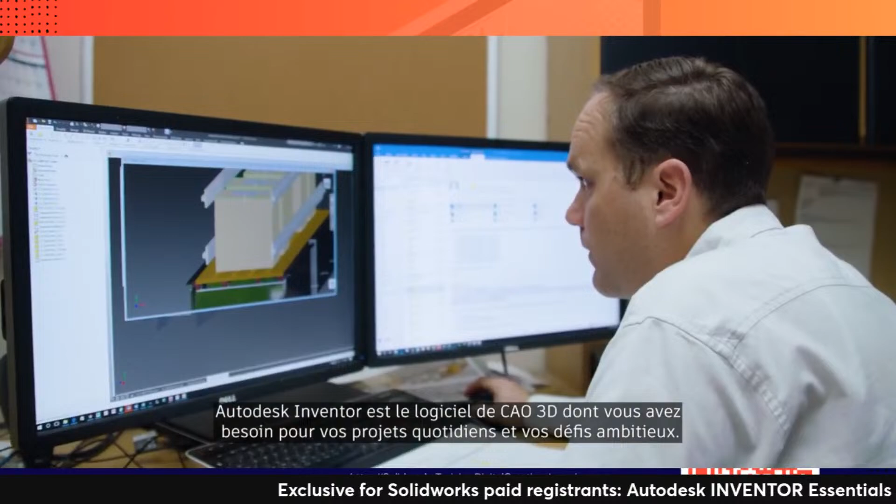From the smallest components to the largest assemblies, Autodesk Inventor is the 3D CAD software you need for everyday projects and ambitious challenges. Inventor puts powerful mechanical design, documentation, and product simulation tools at your fingertips to help you innovate with agility, collaborate effectively, and win more business.

Inventor provides you with a stable and responsive environment to help you get your projects to production faster, with a complete set of tools for sheet metal, welded frames, tube and pipe, and electromechanical, and direct access to a robust content library and engineering calculators.

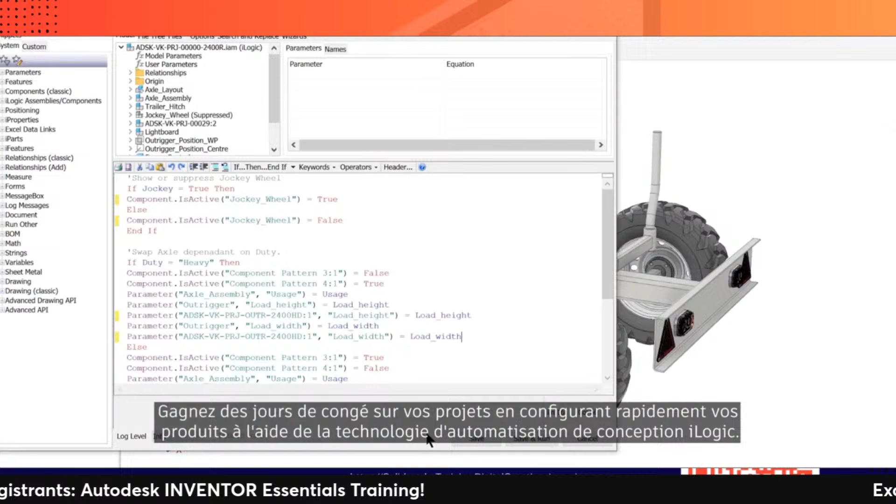Shave days off your projects by rapidly configuring products using iLogic design automation technology. Speed up design reviews with a cloud-based tool that protects your intellectual property. Connect directly with AutoCAD for your project workflows.

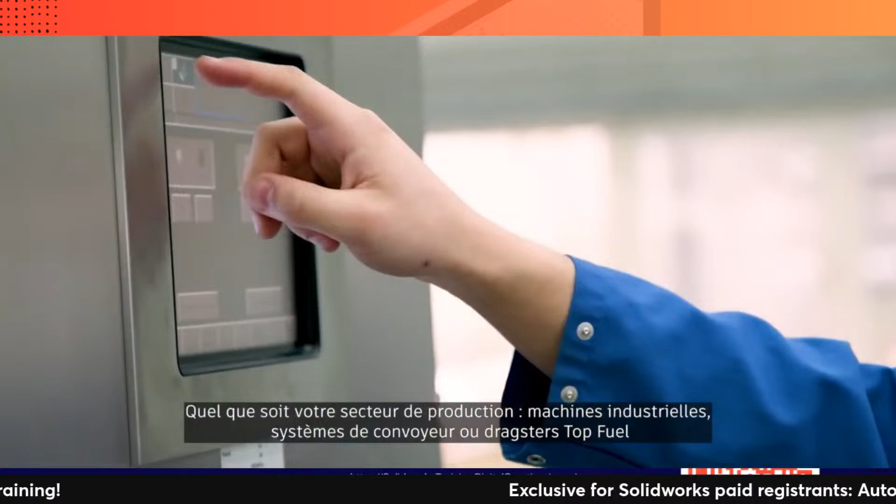And you can extend the power of Inventor with a subscription to the Product Design and Manufacturing Collection to take your designs further with 2D and 3D workflows, cloud-based design and manufacturing, factory planning, and high-end visualization. Regardless of what you make, industrial machines, conveyor systems, or top fuel dragsters, solve your most interesting problems efficiently and effectively with Autodesk Inventor.

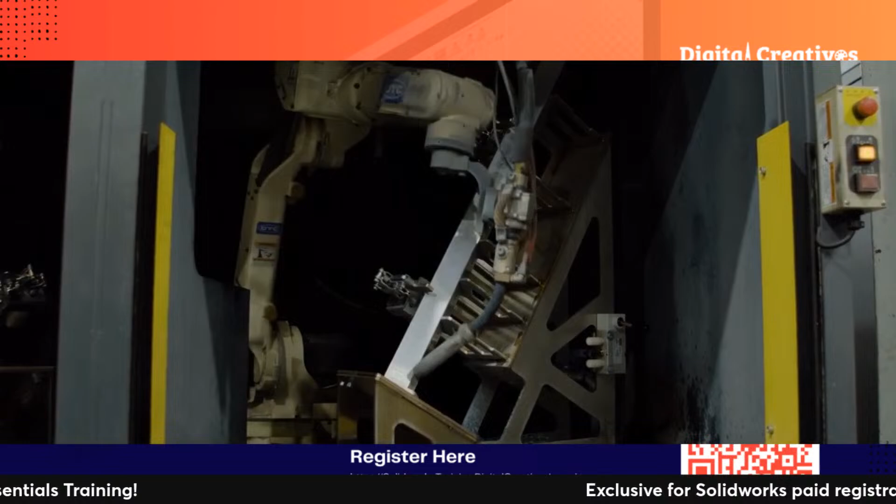A simple project that would have taken 4 hours, we can now do in 20 minutes. And a complex project that would have taken 2 days, we can do in 2 or 3 hours.

We design, manufacture, deliver, and install custom staircases. Every system is new for that customer, so every system is at least a 1/16 of an inch different. We're often one of the last products that gets installed in a home, and if we don't get it right, we can delay them getting a certificate of occupancy.

Without iLogic, it took quite a bit to draw even the simplest of orders. It was very disheartening how much manual labor went into it. We could draw maybe 1 order a day.

We turned to the Autodesk Product Design and Manufacturing Collection. Autodesk Inventor and iLogic has allowed us to automate the engineering or project management process. A lot of things in stair design are repetitive tasks, and iLogic enables us to automate a lot of those so that a human operator doesn't have to get lost in the minutia.

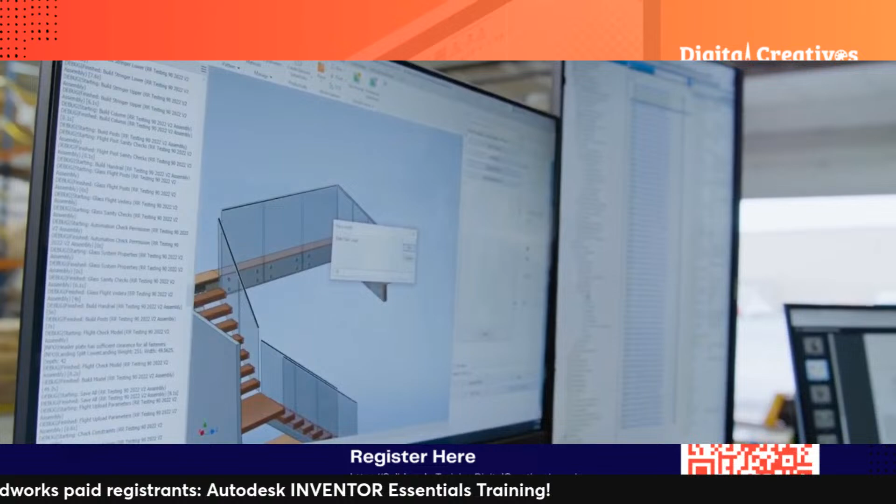So let's say we decided to pull a foot off of that floor, we added a wall there. I would come in and modify the environment, tell it the length, put in either an absolute, or in this case, if they said we subtracted 10 inches, I'd do it. And I would just tell it to update all my glass.

It's going to automatically engineer it for me. It's going to make it so that it meets all building codes that our product is certified for, and it's going to generate shop drawings and production prints for these as it goes. It's that easy. We're manufacturing 10 systems, 20 systems a day right now.

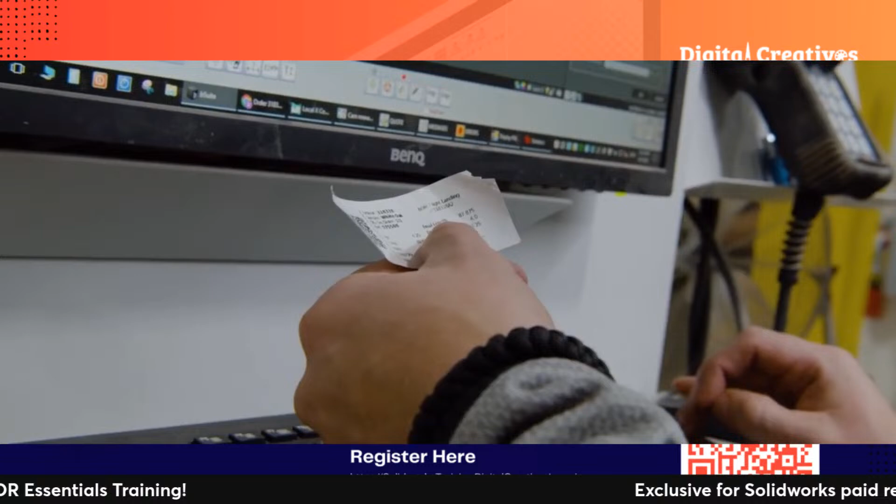With the Inventor CAM, we take the exact model that is part of our automation that we've used to design for the customer, and it's already toolpathed. So that production engineer is just posting that right to the machine. It's a huge time savings, and it's a quality assurance. As we build in more and more automation, we continue to drive down the potential errors that a user can make.

Welcome to Viewrail. Thank you. Have a seat. We leverage the Forge viewer. It enables the customer to view on a web page on their phone exactly what we are engineering and how it will fit into their space.

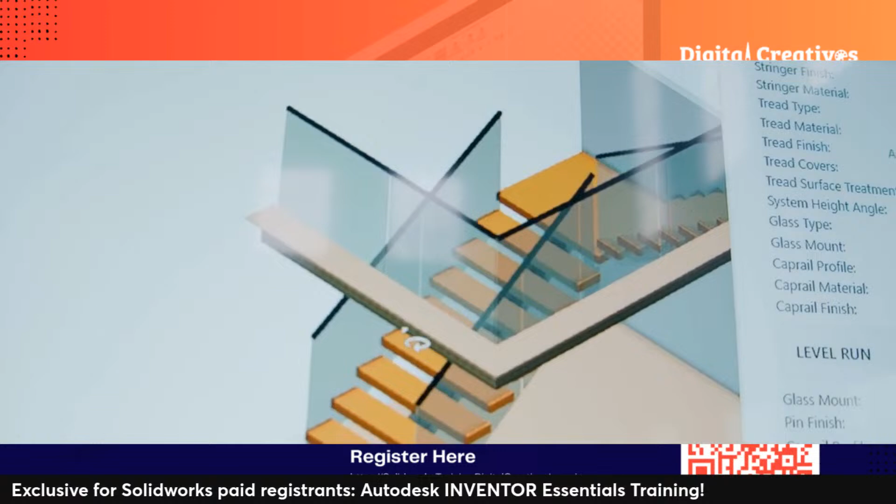This looks amazing. We are now over 10 times the size that we were when we started all of the automation. In the next 5 years, we're going to grow from $100 million a year in revenue to $500 million. Automation is critical for scaling at the rate that we're going. We would not be able to do the things that we are doing today and looking into the future without the Autodesk tools.

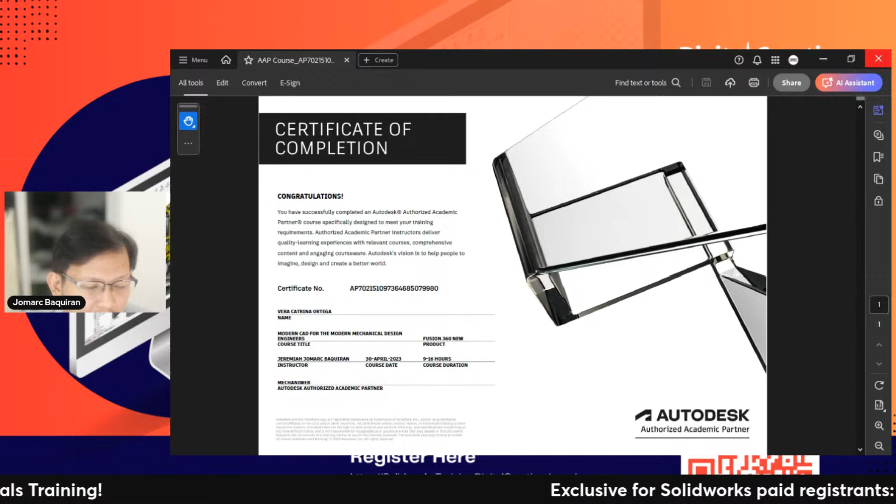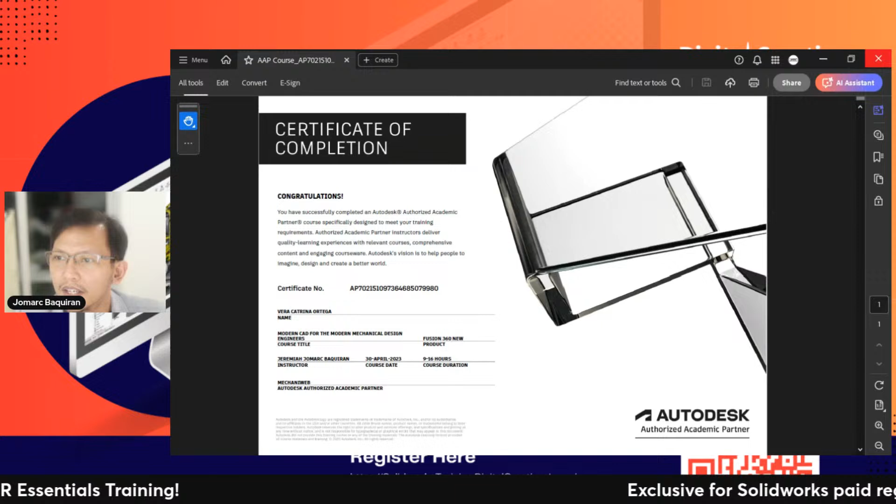Okay, giving you ample time, requesting everyone to start up the Inventor software. I have gone ahead, I already have my Inventor with me. I'm going to close this, going back to the default mode. You can actually open multiple instances of Inventor, I have several opened here.

These cars go over 330 miles an hour and they travel 1,000 feet in less than 3.5 seconds. To accomplish something like that is really tough on the parts. This is not a business where you can make a ton of mistakes. If we don't do our job down to the smallest detail, that driver's life is in our hands. Everything has to be built right. Everybody has to be on their game.

Welcome to Charlotte's Z-Max Dragway for the 4 Wide Nationals. Safety is number one, and then second would be performance. We need to make sure our equipment's strong enough and light enough where we can outperform our opponents. Currently they're finishing up the track prep, we've got Top Fuel Dragsters up next for you. At the 4 Wide Nationals, we had the Autodesk car on Doug Kalitta's Top Fuel Dragster. My expectation is to win every race we go to. In lane 2, we have Doug Kalitta with the Autodesk car.

Inventor is helpful because races in our league can be decided by a thousandth of a second. So if we find something on a part to make it a little bit stronger, a little bit lighter, or a little bit better than what everybody else has, that makes us a big part of winning races. Kalitta crossing the finish line first, clocking in over 330 miles per hour. Seeing something get made and then put on the race car, and us going out and running over 300 miles an hour, that's pretty neat to see.

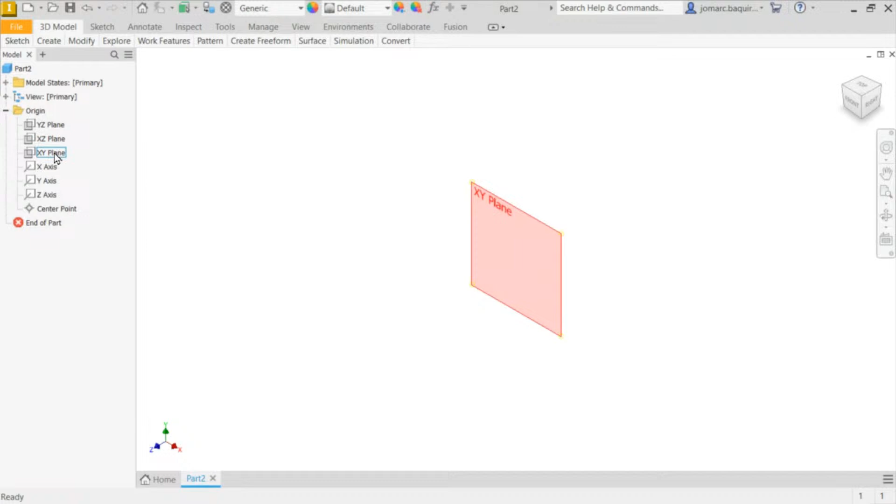Let's first be familiarized with the navigation. So I want you to head over to the XY plane. Again, on the browser or the model tree, I want you to click on XY plane.

Right click and select New Sketch. Again, our view is normal to the XY plane. I'm going to cycle over these controls - I want to see the full view of my ribbon, so I click this minimize to panel buttons. Again, for the absolute beginner, let's get ourselves familiarized with the controls and navigation.

I'm going to click on rectangle. Left click here, left click here. I'm not too concerned about the dimensions. The rectangle tool is still active, so I'm going to hit escape, then select finish.

So whenever you see this green check mark, it's an indication or visual cue that we are in sketch mode. So I'm going to click on finish.

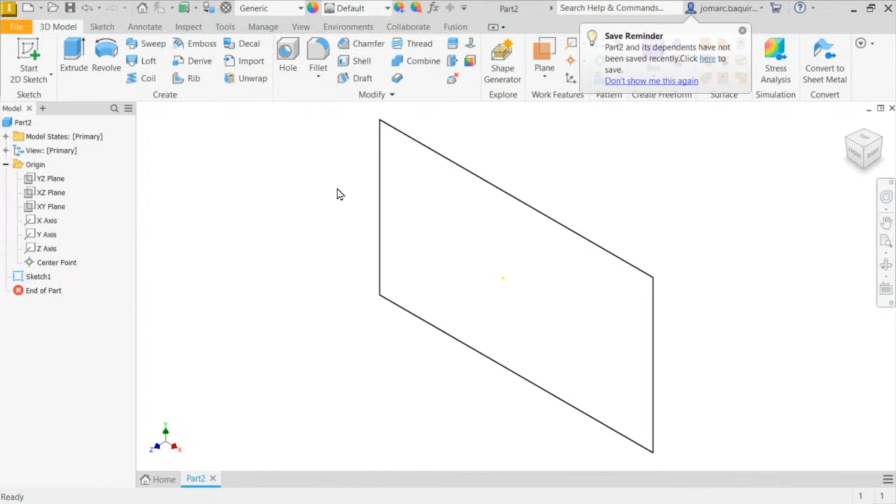Okay, next I'm going to hit extrude. So it automatically selected this profile. Let me pull this arrow, giving this a height or depth, and select OK. So as quick as that, we have created a 3D model coming from a 2D sketch.

So for the controls, if I roll out my scroll wheel, I want you to roll this until it's completely far away. To bring this back to the full extent of our screen or canvas...

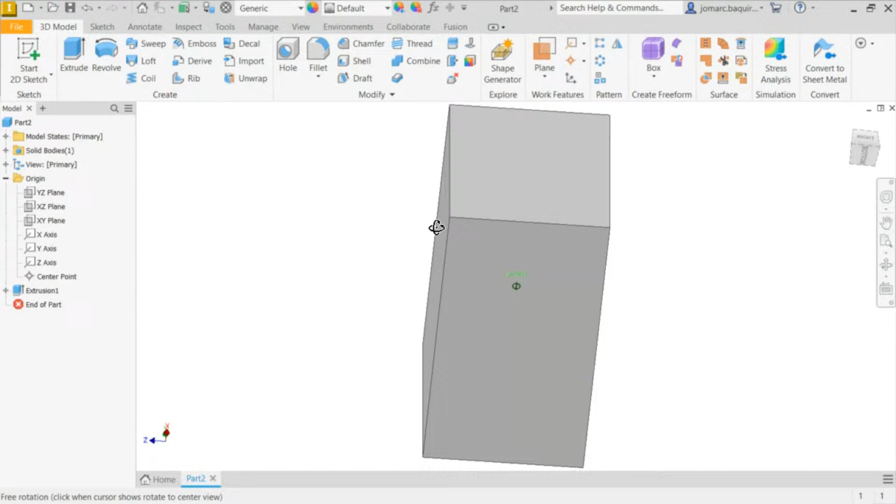I'm going to double click on my middle mouse - that brings it back to full extent. And to rotate this, it's shift and holding our middle mouse. I'm rotating or orbiting this 3D model, and to go back to the default isometric view, it's hitting F6.

And if I would like to pan the view, it's holding the middle mouse. Notice that hand when I'm pressing the middle mouse button - so I'm panning, currently rotating. And if I hit F6, it goes back to the default isometric view.

Feel free, giving you a few minutes, few seconds to be familiarized. Okay, so hope you are familiarized with the navigation already.

Next, notice as well on our model tree, a recording of our actions was made. Initially, pay attention to your left side of the screen - recall we created a sketch, right? And then we created an extrusion, and that sketch was consumed by this extrusion.

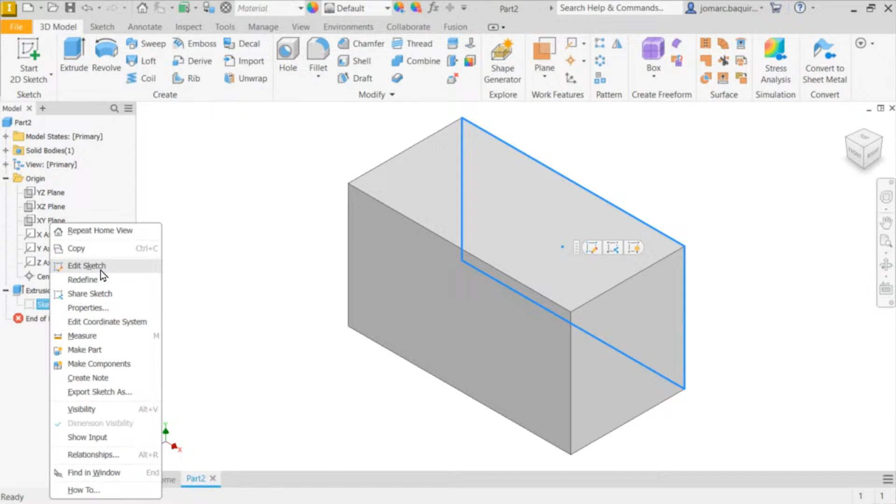So we're now again in sketch mode. Again, the visual cue is this green finish check mark.

I'm going to create a window selection - window, same as AutoCAD. This is window, and this is window crossing. Notice the difference: for window selection, the entity to be selected needs to be entirely inside this rectangular pinkish rectangle, so everything inside gets selected. For crossing, whatever this window hits gets selected - so if I create a window selection here, this side, this entity or line, will not be selected.

So again, creating a window selection, right click or hit delete. I want you to select delete. So we're creating a fresh or new sketch.

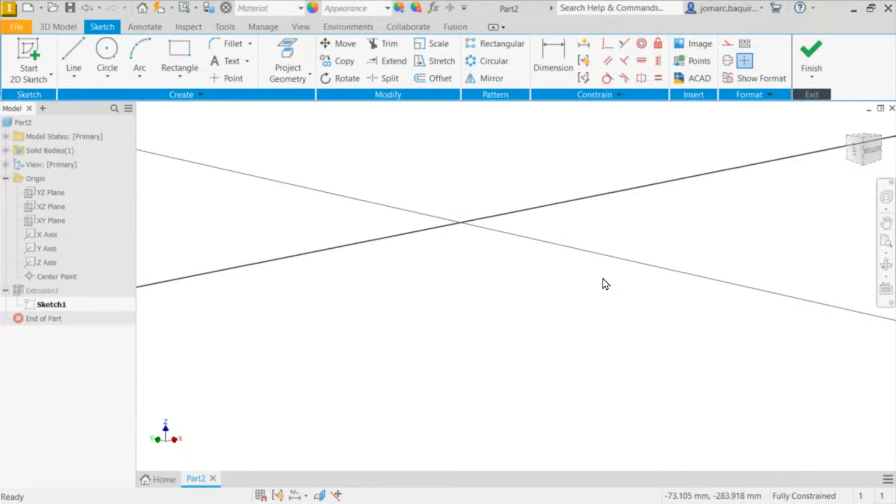Since we were initially in the XY plane, I can simply head over to the view cube and select front. So heading to front view now.

Now let's create some sketches. Of course, the mastery of part modeling and assembly modeling all starts with the sketch. Everything starts with sketch, even for those in animation or character modeling. If you have a character, it all starts with the sketch. For example, the character model made in Maya 3D starts as a 2D sketch that gets inserted into Maya to create that 2D into 3D. So it all starts with a sketch.

For me personally, my definition of sketch is a quick drawing. If your boss told you to create a sketch of a table, it's a quick drawing of a table. So again, we are in sketch mode, meaning we have to be quick, or hoping in the future you have the ability to do quick sketches.

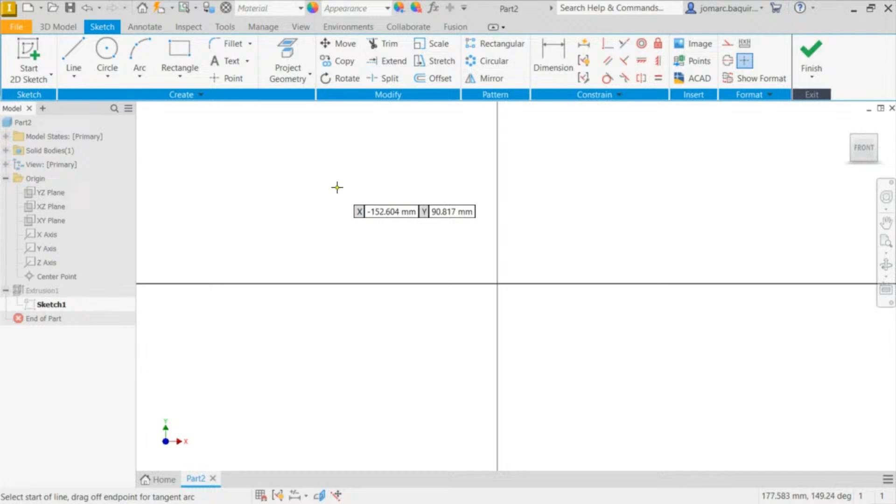So for now, I want you to select line. Similar to AutoCAD, the shortcut key for that is L. Again, hitting escape disables that command. So notice if I hit L, this command is highlighted.

I want you to left click here, one left click, double left click. Then I'll create another line: left click, left click, left click, double left click. So if I simply do a left click, I am creating a chain of lines. And if I ever wanted to terminate this chain of lines, I double left click.

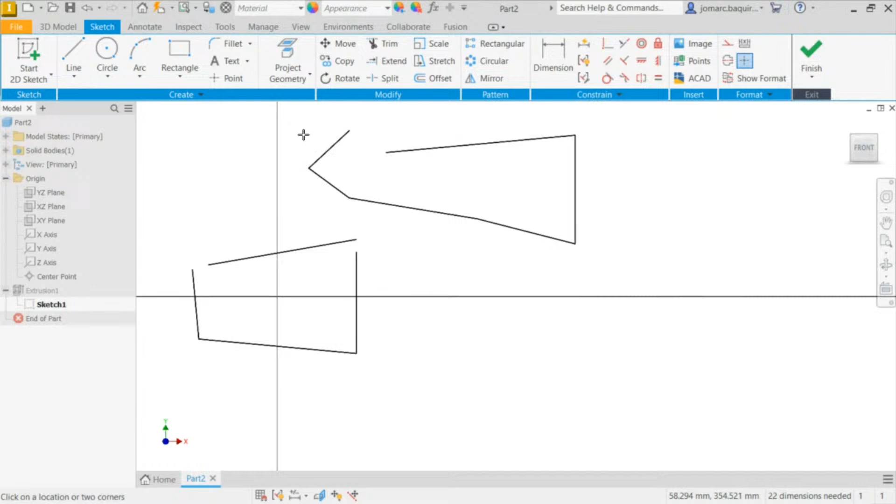So I'm going to delete these lines. To delete a line, simply select that line or create a window or crossing selection, then hit delete. So this is what we have created so far.

By default in Inventor, it adds constraints, and those constraints are initially turned off. So if I hit F8 and F9 - F8 is for the constraints to be visible, and to turn off its visibility it's F9. Notice here, if I select F8, automatically one of the lines that I have created has a vertical constraint.

Which means when you say constraint, it's sort of like you are shackled. This line is constrained to be perfectly vertical. So whatever I do, if I select this endpoint and drag it around, it stays completely vertical. Our set of constraints are located on the top ribbon under constraint. So if I want this not to be perfectly vertical, I can select this vertical constraint and delete it, and notice I can make this diagonal.

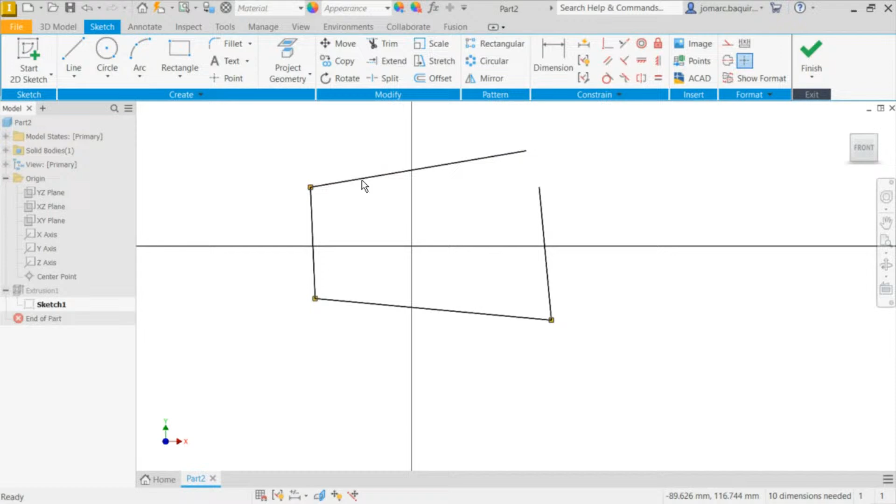Turning off the visibility and selecting this endpoint, I can drag this around and they are completely coincident with each other. So the difference between Inventor and SolidWorks is there's a consistent need for pressing F8 and F9 so you don't accidentally select the constraint itself.

So next, I want this top line to be perfectly horizontal. I'm going to head up and select horizontal, or the minus sign, selecting this line to be perfectly horizontal. Same with this line, horizontal.

And for this line to be vertical, I'm going to hit I, or simply head over to our constraints and select the vertical constraint, selecting this line. So our objective here is to create a rectangle.

Next, I'm going to have these two endpoints coincident with each other. So selecting coincident, selecting this point and this point, then hitting escape.

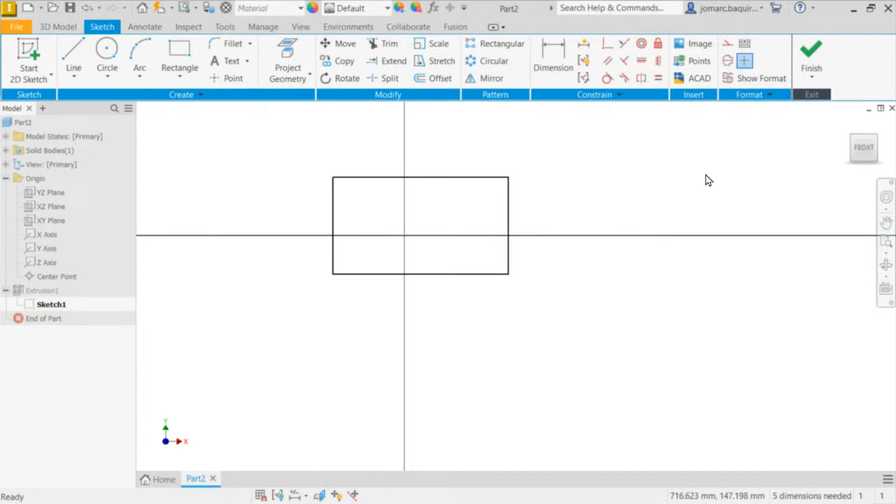Okay, so next, how about creating some two diagonal lines here? Left click, double left click, double left click. In addition to that, we'll be having an activity, or your assignment.

So for this challenge, the top horizontal line and bottom horizontal line are actually parallel as well. But another method of making these two parallel is, of course, making them both horizontal. So again, a demo for making things parallel: selecting parallel. Notice the constraint symbol, and if I drag this, they are perfectly parallel with each other.

So, question: what is the angle created in a perpendicular situation? I'm going to hit L to create another line, coincident with this diagonal line, then double left click.

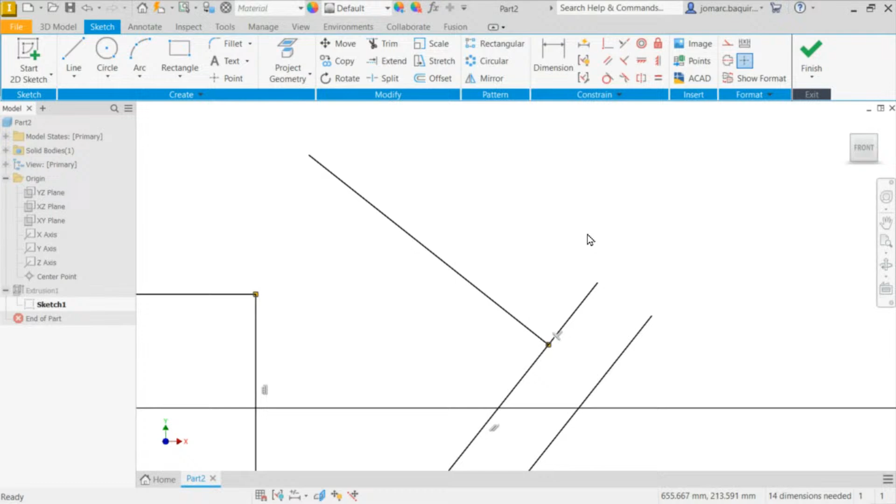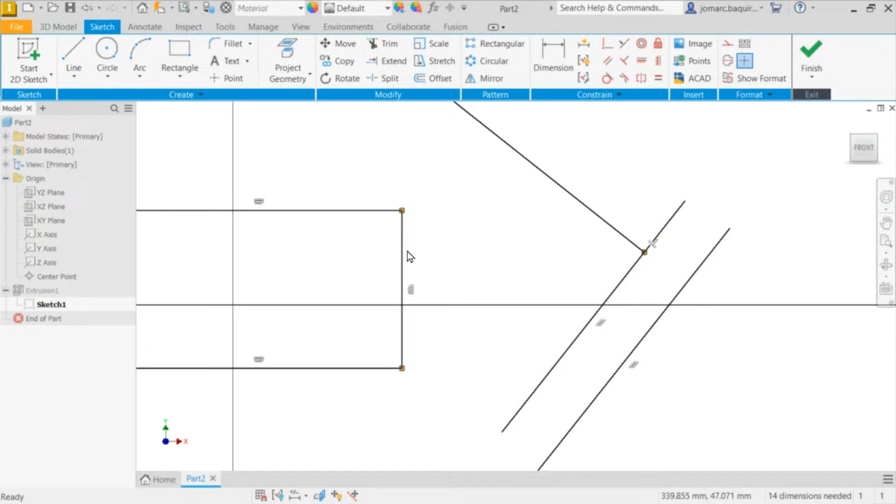Notice as well, if I hover over the constraint symbol, it highlights the two entities sharing the same constraint. So this line and this line, of course, are both in perpendicular constraint. Same, if I hover over here, both of these diagonal lines are parallel. Hovering over here, this one is horizontal, vertical.

Again, requesting everyone to follow along. We're currently in familiarization of the constraints. Again, this is very essential. You'll be having difficulty if you go to assembly, to part modeling, if you don't have the grasp and mastery of constraints. Of course, in SolidWorks, it's called relations.

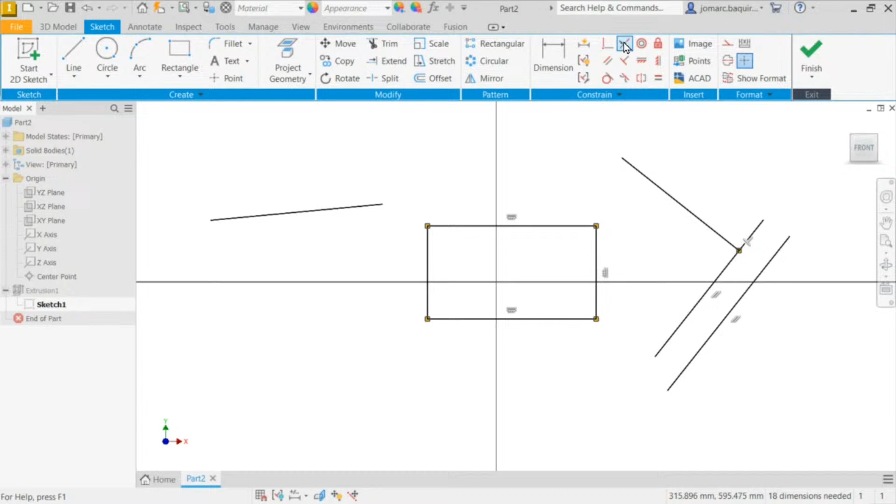Okay, so perpendicular done. Let's say I create a new line again, somewhere around here. Left click, double left click. And my next intent is to have this line and this line collinear with each other. So the best way to do that is heading over to constraints and selecting collinear constraint. So selecting this line and this horizontal line.

So hitting escape, moving this. Turning the visibility off for the constraints. I'm dragging this line on the left. Notice this right line on the right is following the up and down movement of this line, because they are both collinear with each other. Okay? So next, I'm going to delete these lines. Selecting, deleting them all.

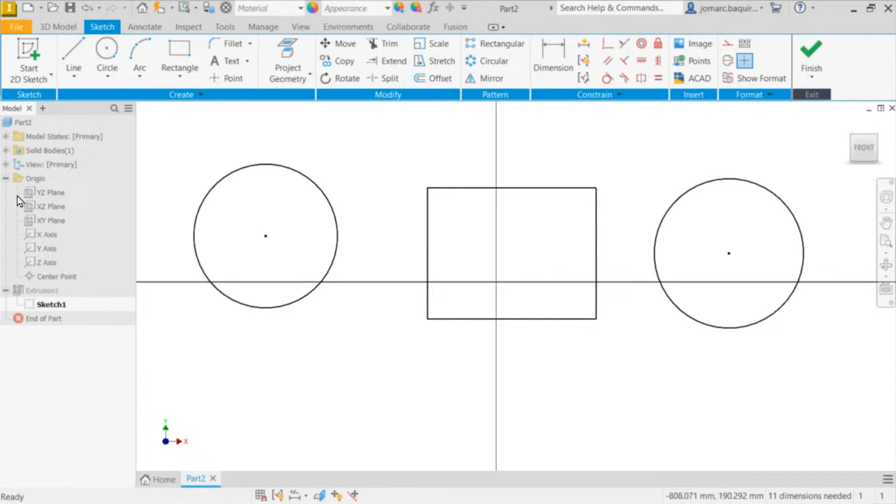About creating a circle. So let's create a circle. Shortcut key for that is Control-Shift-C. Control-Shift-C to create a circle. So creating another one here, another one here. I want you to create 2 circles. And because this doesn't have any dimensions yet, the diameter is not yet defined for these 2 circles, right? So I can resize them by selecting its circumference, resizing this, placing it here, placing it here.

Okay? Again, feel free to experiment, to be familiarized. Taking things slow.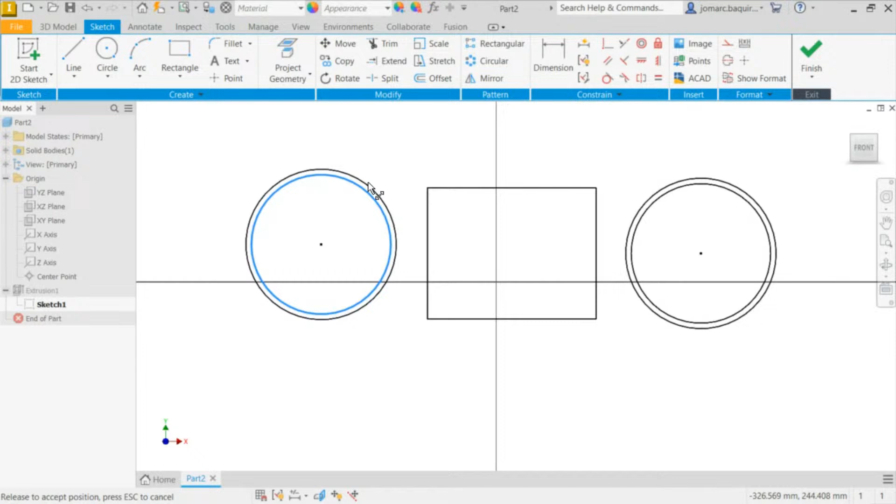Okay, next. So let's discover equal constraints. Selecting equal, selecting this circle, hitting escape, and if I resize the right circle, because they are both equal, what I do to this right circle is the same. So both are now sharing the same diameter.

Of course, it applies to everything as well. Same as with lines. So creating 2 lines, another line here. I want them both to be equal in length. So selecting equal constraint, selecting this line and this line. So both now share the same length. Okay? Deleting these 2 lines. Same as well when you create arcs. The radius, if you apply equal, both of them would be equal.

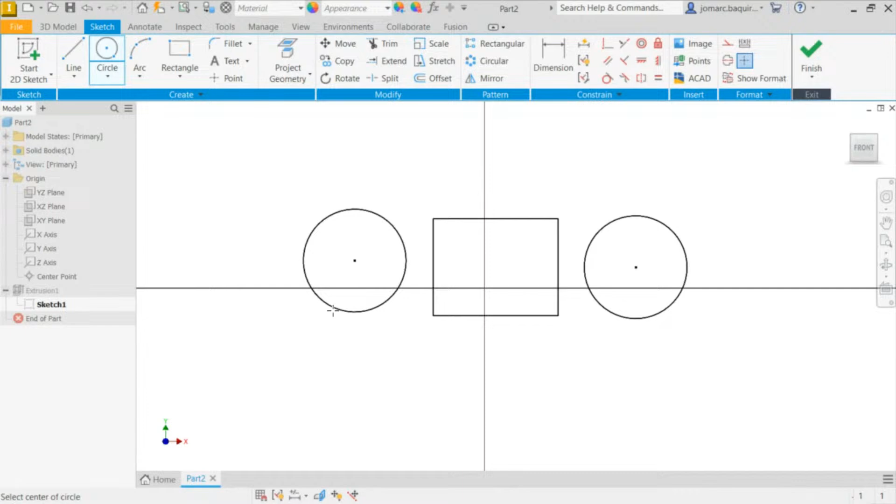Okay, going back. We now have discovered the equal constraint. Let's create another circle. This time, it's much smaller. Somewhere around here. Again, requesting everyone to follow along. We now have 4 circles and a rectangle.

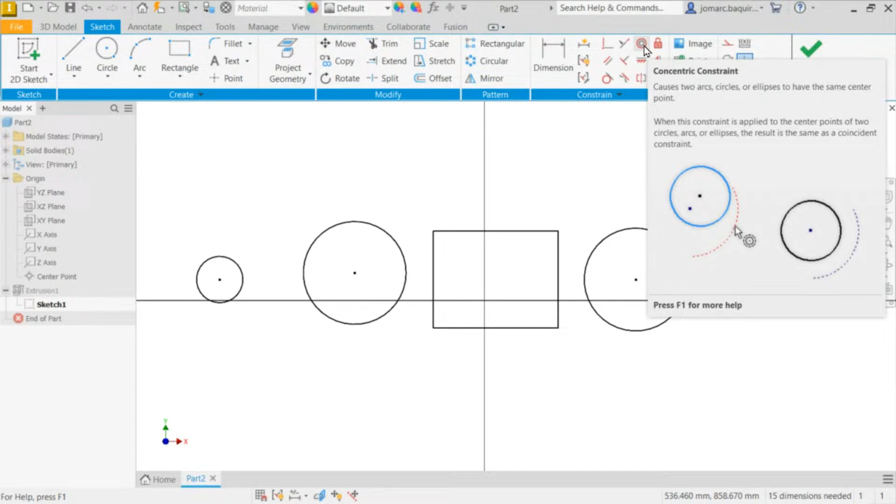Okay. So next, let's discover concentric. For concentric, the center points of those 2 circles become coincident. That's actually what concentric does. So if I select concentric, selecting this large circle and this smaller circle, notice the center points of these 2 circles are now coincident with each other.

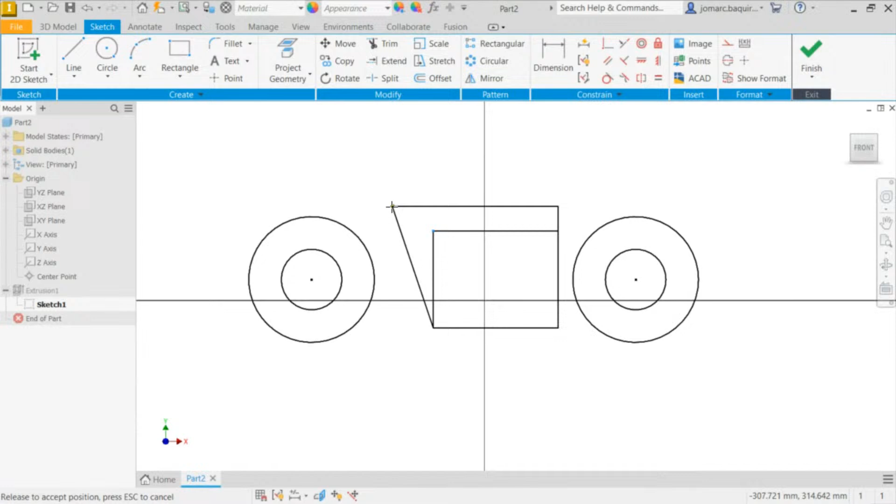Okay. So next, how about discovering tangent constraint? Selecting tangent. I'm going to select this horizontal line and this circle. Hitting escape. Turning on visibility for constraints, F8. Hovering over, notice this circle and this horizontal line. F9 to turn off. And if I drag this line up and down, notice the effect of the tangent constraint.

So let me apply another tangent constraint as well to this bottom horizontal line and this circle. I'm going to hit escape. Now if I resize this circle, notice again the effect. I want you to drag and resize. Again, requesting everyone to follow along.

If I move or select the center point, notice the effect of that tangent. So let's apply the tangent as well to this other side. Selecting horizontal, the circle, horizontal, and the circle.

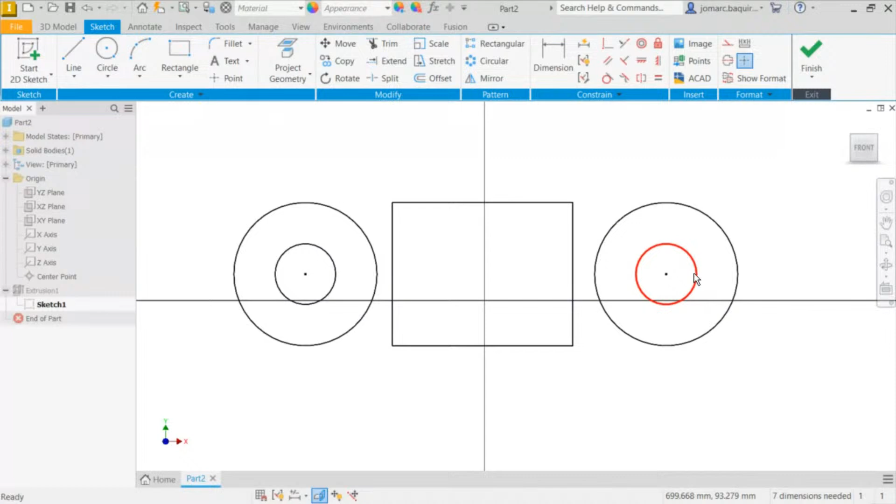So if you saw that prompt earlier, a few seconds ago, it's mentioning an over constraint, a conflict of constraints. Okay, so next, let me resize this, move this around here.

Next, I want you to place the center point at the midpoint of this vertical line. There's actually no midpoint constraint; it is actually located in the coincident constraint. Again, our intent is to have this center point be coincident with the midpoint of this line.

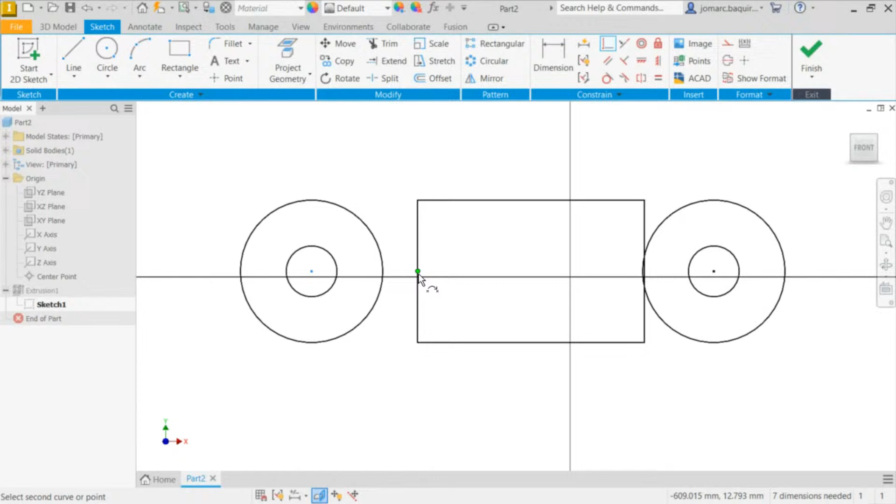So selecting coincident, selecting this center point and this midpoint. If I hover over this vertical line, there's a green dot indicating that that's the midpoint. Selecting this, repeating the steps here as well, selecting this center point and this midpoint, hitting escape. Let's resize, let's drag, let's check.

Okay. I can also create a window selection and drag them all at once. Okay, dragging them somewhere around here.

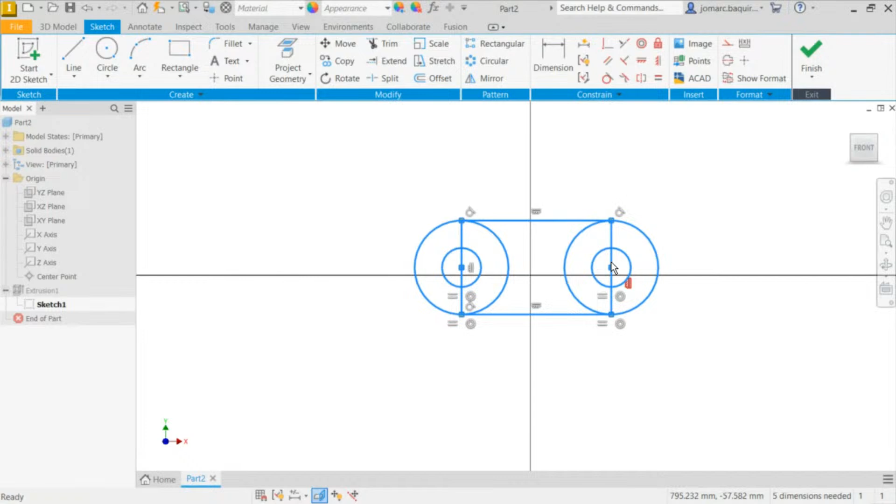Notice earlier I mentioned the 3 initial planes, and recall in AutoCAD when we create a line and we want it to be at the coordinates, we do at 0, 0. Recall that? When we want the line placed at the origin, XYZ 0, 0, 0. The difference with Inventor, we can do that right away.

Actually, the XYZ 0 coordinates are hidden by default, and it's actually this center point. Notice that yellow dot, that's the center point. For this geometry, the geometric center of the sketch is somewhere around here. It's good practice to have the geometric center and the center point 0, 0 aligned, but of course it depends on the need.

But by default I want you to think that the geometric center and the origin should preferably be coincident. In preparation for things like mirroring this on the other side, I have this center or plane to be used to mirror it. Instead of creating a new line as a mirror reference, let's utilize the existing ones.

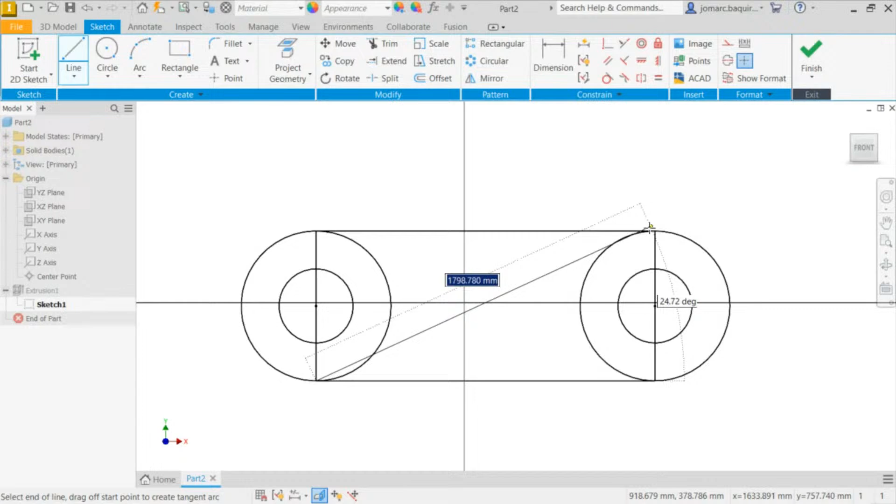Next task, I want the geometric center of this sketch to be coincident with our center point. One way is to create a line from this endpoint to this endpoint. Next, I want this diagonal line's midpoint to be coincident with the center point.

To do that, I'm going to select coincident, selecting that midpoint, that green dot, left click. Because the center point is not visible, I'm going to head to our model tree and select center point. Now this is perfectly at the center together with our center point, 0, 0. Okay?

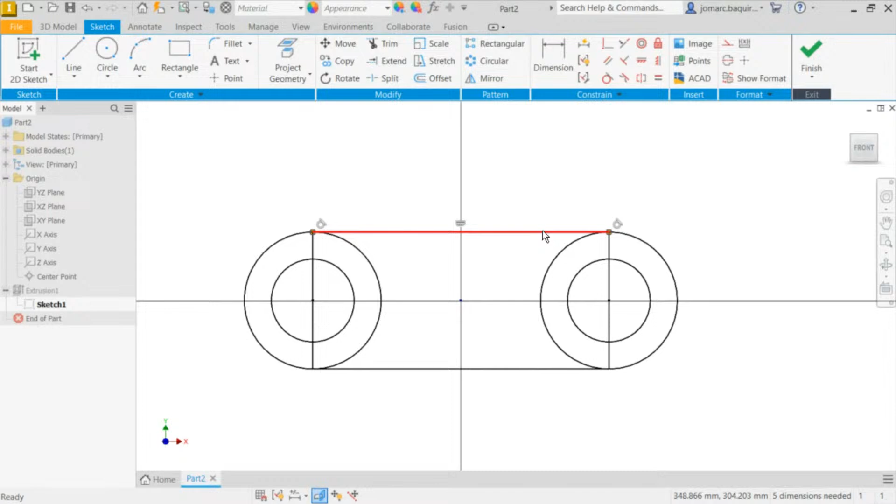Another way is deleting that line and aligning the midpoint of this line vertically with our center, same with this line. Let's check. I'm going to select vertical constraint, selecting this midpoint and our center point. Okay. I think I'll have an over constraint if I select this center point and our center point.

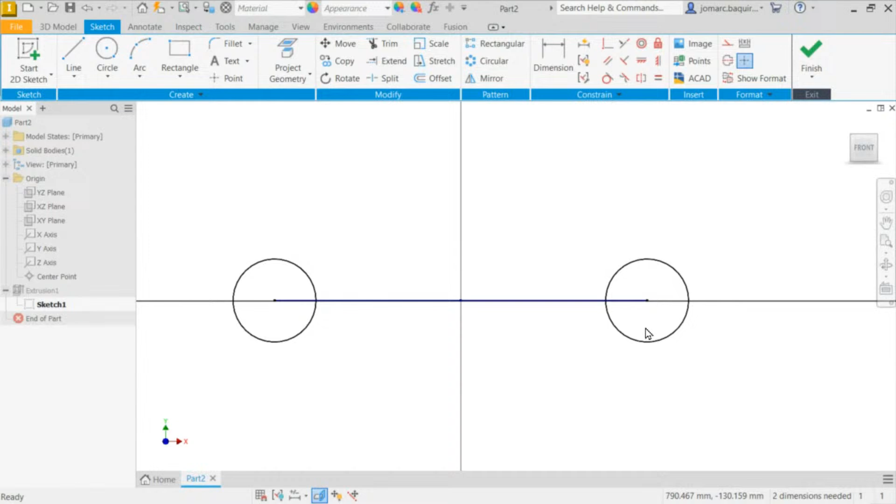So this is why it's important to resize and drag things to check what constraints need to be applied or what's missing. I'm seeing here I no longer need to apply the horizontal constraint. And notice as well, our entities are in black. Everything is black right now.

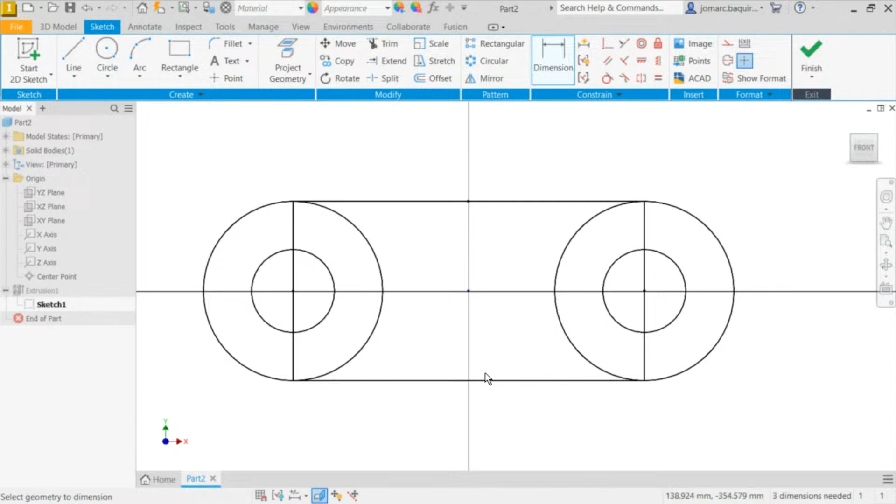Next, we now have our target shape. Let's fully define this geometric figure by pressing D or heading up to constrain. On the left side, there's dimension. I'm going to select this, selecting these two vertical lines, and key in 100.

Zoom in. I'm going to pull this dimension over here. Again, hit D for dimension, selecting this circle, and I prefer the dimension to be 50. Notice the change of colors. From black, it's now dark blue. The remaining black entities are these two circles.

To turn these dark blue as well, I'll hit D again and define the diameter to be 25. Notice everything now is in dark blue. I'm going to hit F6, revolve.

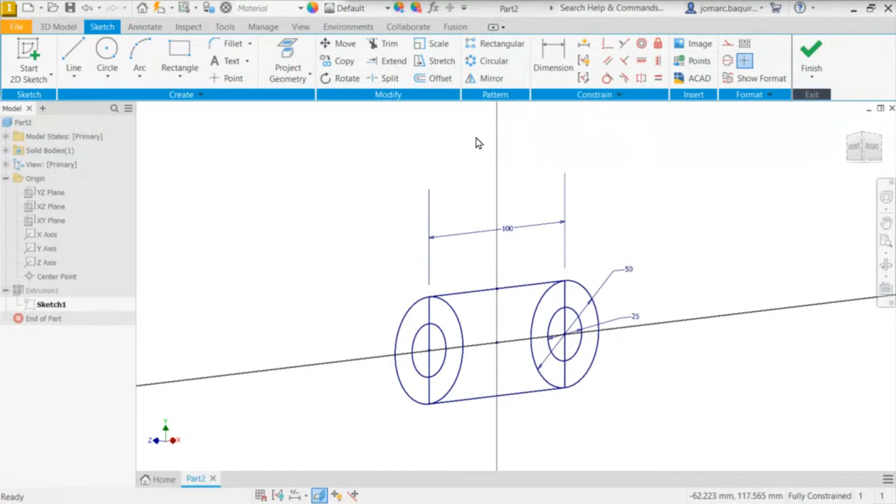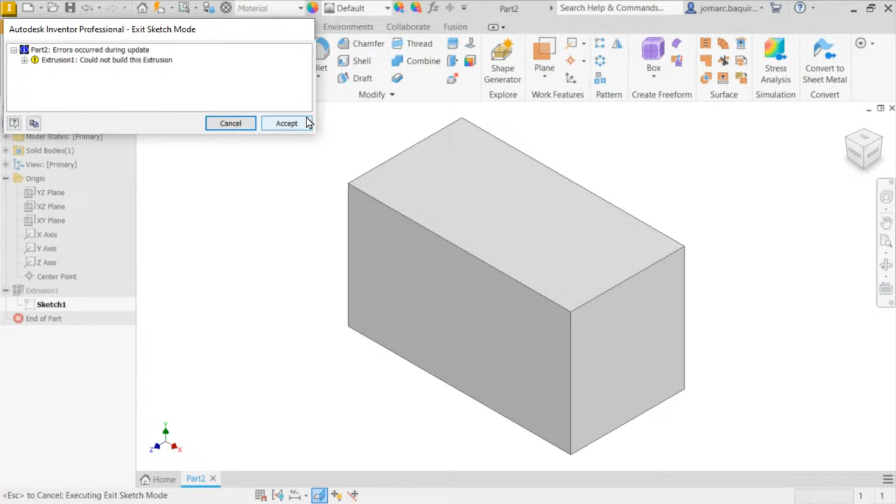Okay, head back to front view. So from here, I can now hit finish sketch. And of course, we have an error. Okay, this was previously a rectangular extrusion. Now it's a sort of slot type. I'm going to hit accept.

Now I am forced to go back to extrusion. I'm going to hit edit feature and reselect these profiles. So these profiles, okay. So again, right click, edit feature, creating a window selection. Again, I have created a window selection. And from creating a window selection, I have selected 9 profiles.

And as I have mentioned on 2D, we always prefer things at the center. Same as well in 3D. So I'm going to change the direction to symmetric. Let me drag this arrow. I prefer this to have a thickness somewhere around, what about 10? Okay, I prefer 10. Hitting enter. Hitting F6 for isometric view.

So, of course, in design, aside from the only constant thing in this world is change. Definitely in design, there's always changes. May it be from the customers, from your boss, and I hope not from your wife.

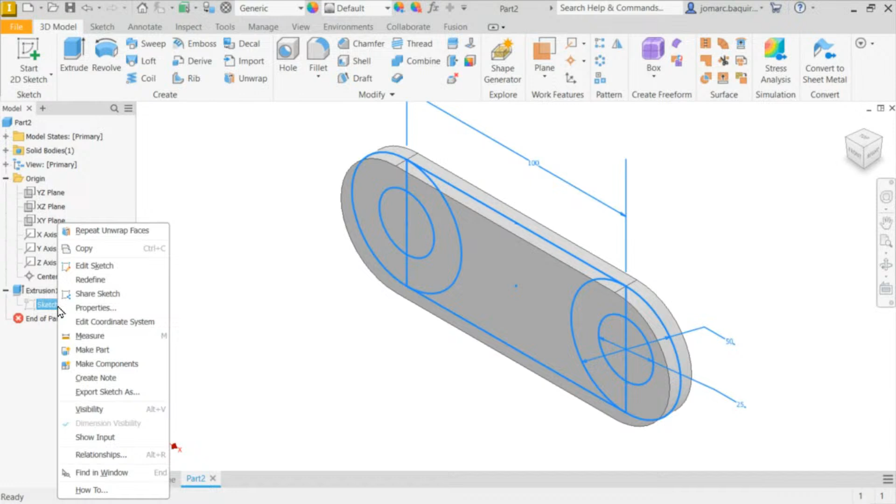Okay, so heading back to sketch, let's say there's an update. We're required to have the pitch to be 110. So double clicking 100, double left click again this dimension. Let's say I prefer 110. Hitting enter. So notice it updated, selecting finish, and it's now 110.

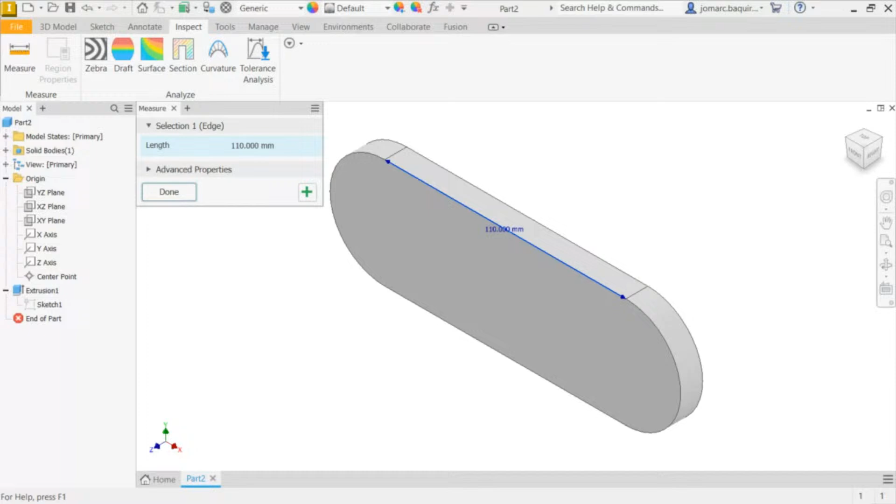So I know that because if I select this edge, okay, or under inspect, I select measure. If I select this edge, of course, confirm it's 110. Okay. Yeah, okay. So I want you to of course recreate what we have created. So it's currently 110, 50, and 25.

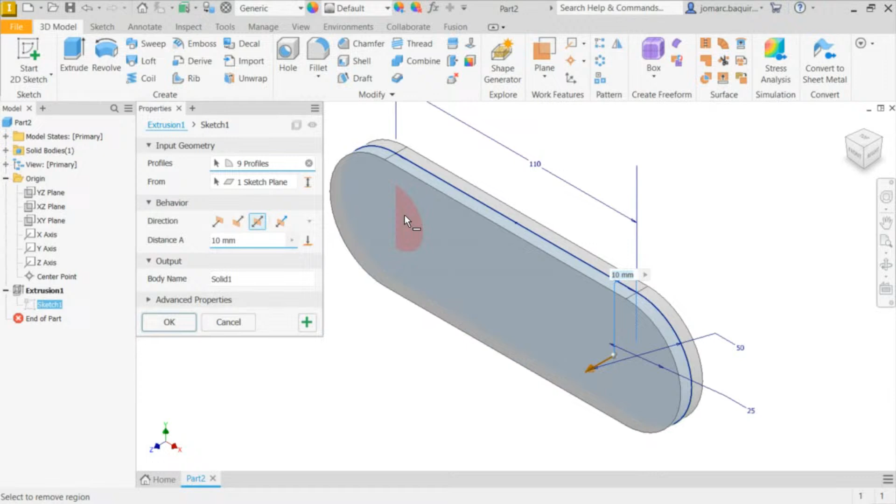Okay, so another update. We have forgotten, we became oblivious to placing the hole on this slot. So we need to go back again to extrusion. Right click, edit feature, and notice our profiles is currently 9. So right now I prefer removing these additional profiles. So control left click, heading over to the right side, control left click, control left click. So 5 profiles are now under extrusion 1.

So we have now created that hole. So selecting OK. Again, I want you to update our activity to an extrusion having 2 holes.

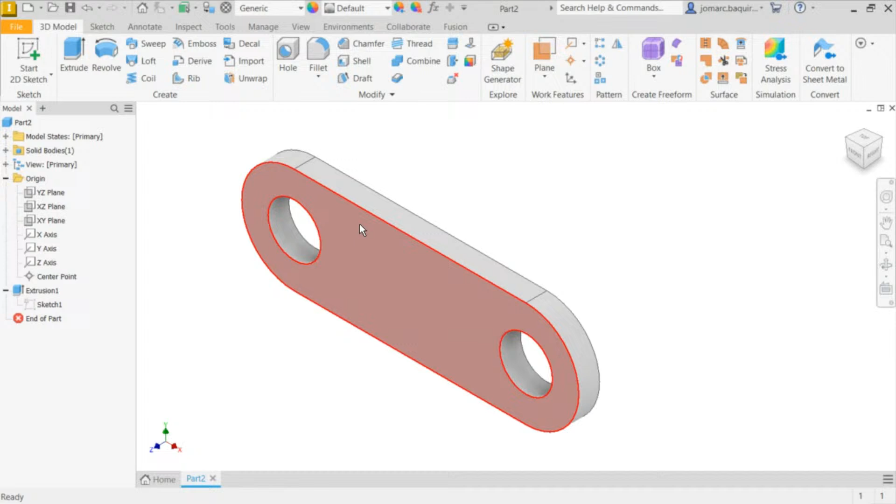Okay, so let's now move on and let me give you a simple activity. I want you to recreate this 2D challenge. Okay. So let me hit Control N. I prefer this to be in metric, standard millimeter.ipt, double left click. Okay. Again, sketch is a quick drawing.

So if I was given this challenge, I'm going to be quickly hitting L for line. I'm going to sketch, I prefer on the XY plane. And I'm going to create this type of sketch. I'm going to create a circle here. So this is my quick sketch of this challenge.

And notice as well for this challenge, all dimensions are referring to this point, which means I'm going to have this point and that point, which is our center point, coincident with each other. So I'm going to select coincident, selecting this point and our center point.

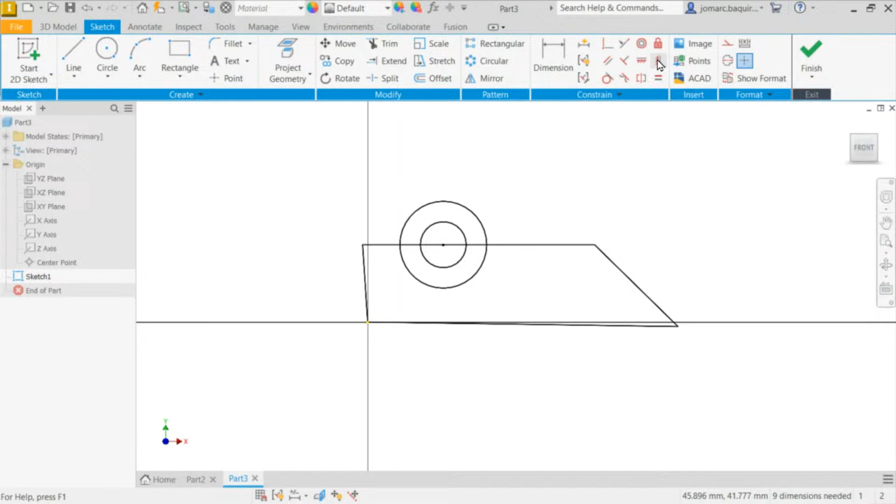Okay, so next, of course, applying the obvious. This needs to be vertical. I'm going to select vertical constraint. This one to be horizontal. This one to be horizontal. And from here, again, I can now apply the dimensions. So what are those dimensions? 120, 25, and 30.

So D, 120, 25. Again, make it a habit. I'm going to hit undo or delete this. What is actually indicated as 25, it's not actually these points. So imagine if this is undergoing QA, I have a caliper and I'm going to measure these two distances. The caliper will actually land on this line and this line.

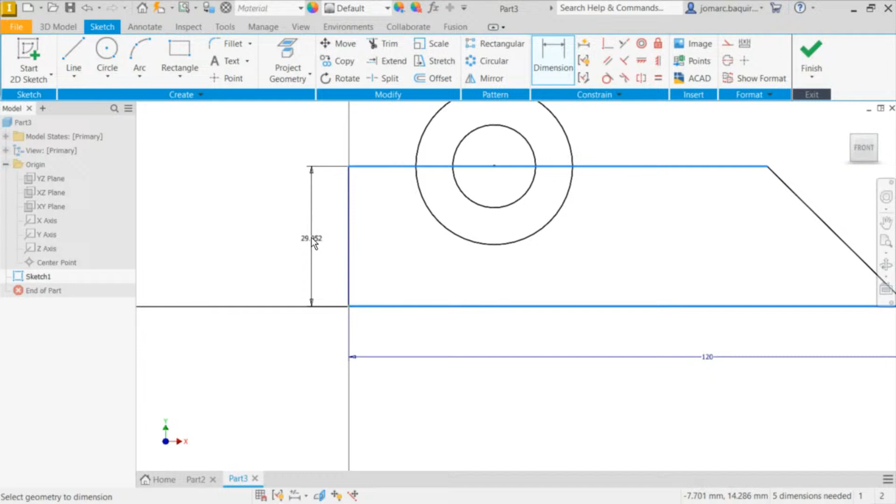So that's why I'm highly suggesting, instead of selecting these 2 points, when you create that 25, you should select this horizontal line. Again, 25. Dimension still active, selecting this line and this center point to be 30. Okay, what else? This one needs to be 45.

Okay, showing you again the activity. We're missing the 20 diameter, the radius, that arc to be 20 in radius as well. So again, 20 inside. So D, this one to be 20. And again, notice the challenge. It's actually one circle only.

So to do that, I'm going to head over to Modify. I'm going to select Trim. I'm going to trim out this line, this arc, this line, this line. Again, make it a habit to select the entities and move them to check. So moving this. Okay, my question to our participants: what constraint is needed for this situation?

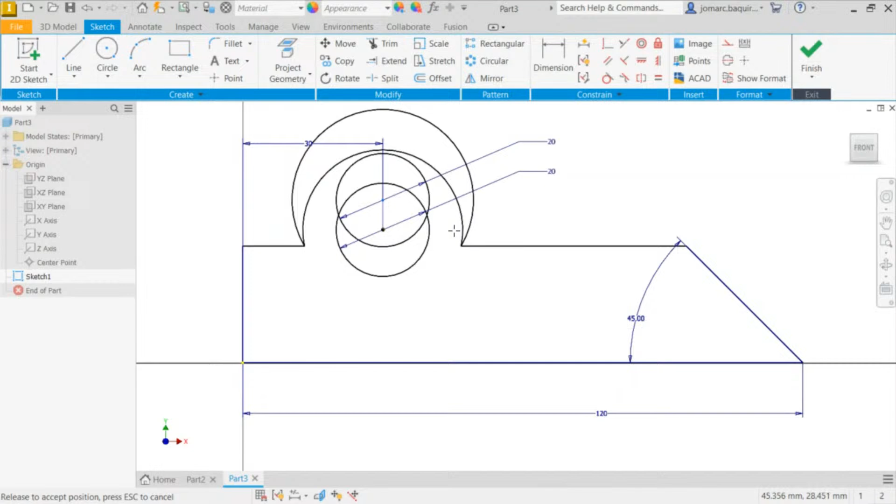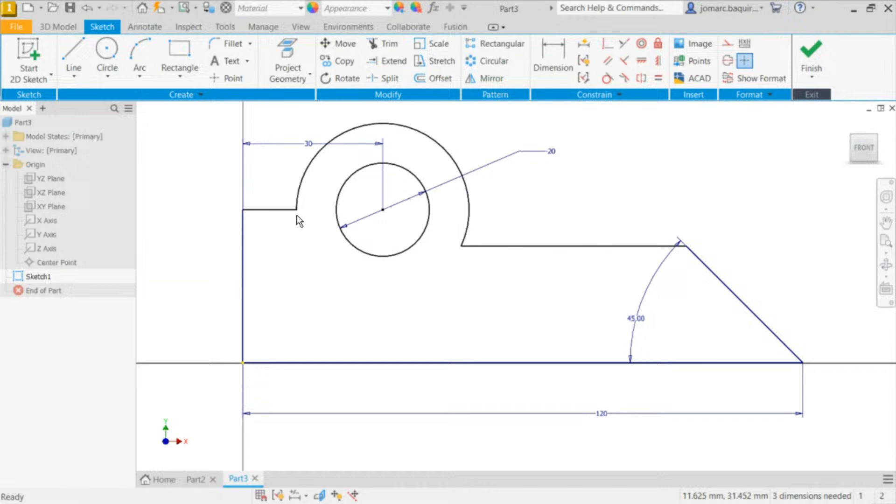So the answer for that, to have this line aligned horizontally, of course, I have mentioned it now, we need the horizontal constraint. So selecting horizontal. Again, the horizontal constraint is not only applicable to lines but to points as well. So selecting this center point and this point. Let's check. Okay, these 2 points are now perfectly horizontal with each other, but this one was left out.

So from there, if you can recall, we discovered earlier the collinear constraint. So selecting collinear, selecting this line and this line. So checking, moving them all. So what am I lacking? I'm lacking again the 25 dimension. So selecting this line and this line. 25.

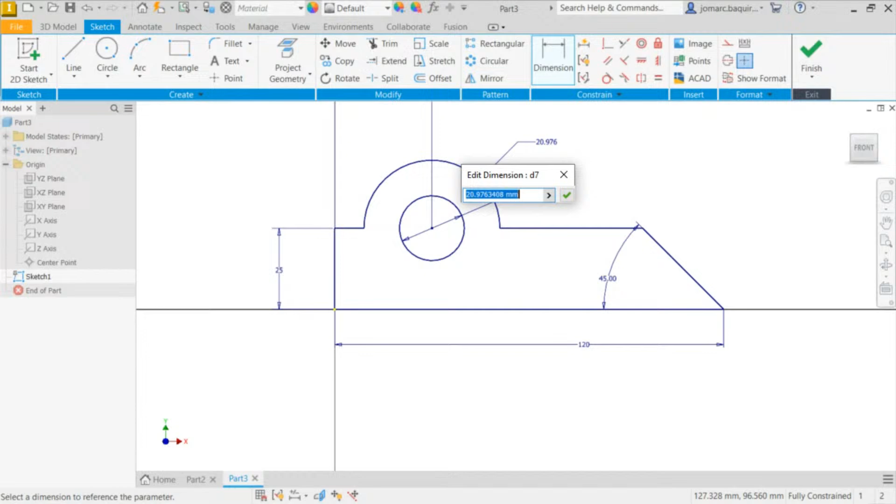Next, because I trimmed out that circle, it's now losing its dimension. So again, if you move things, you'll discover what needs to be done. So for here, we need that radius. For this arc, it needs to be 20. Everything now is in dark blue color, meaning if I forcibly move these entities, it won't move because it's fully defined, fully constrained. We're now done with this activity, selecting Finish.

Okay, and from here I can now extrude this, selecting this profile, selecting symmetric, and feel free to add what thickness you prefer. So I prefer 10. Okay, hitting F6 for isometric view.

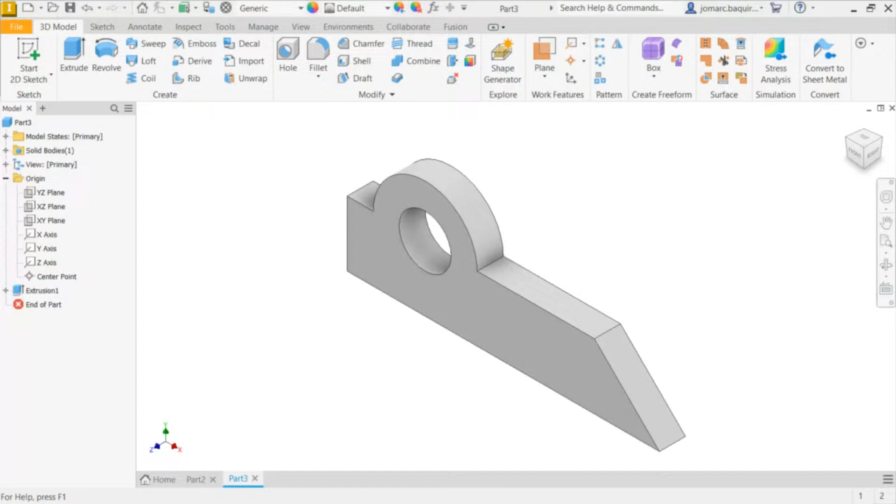So I'm going to be leaving 2 challenges for you, and on our next meeting we'll be discussing how to create those challenges. It's not actually 2, it's 3. So I want you to screen capture this challenge number 2. Screen capture this, and this would be challenge number 1. Okay, this would be challenge number 3. So to our participants, again, screen capture this, or feel free to go back to our videos.

And for the last challenge, imagine looking at this from this side. I want you to create only the sketch, not in 3D. One sketch only for this 3-part assembly. Again, I want you to create the sketch only for this. So for that one, I want you to screen capture this. Again, it's an additional assignment.

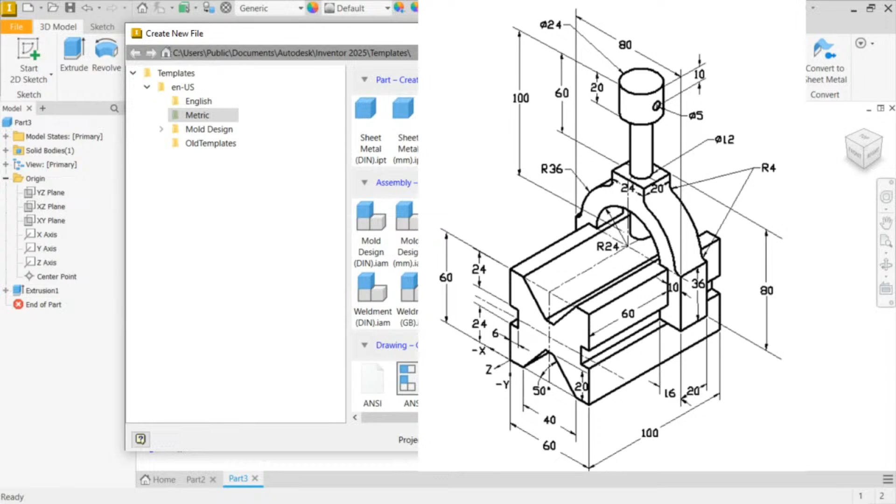I'm going to hit Control N. Okay, let me turn this off. This is what I would like you to do. So I'm creating another part in millimeter. I'm going to hit line. Okay, on the XY plane, and I'm going to select 2-point center. I want everything to be on sketch 1. So no multiple sketches. So for that, recall there's a slot there for this.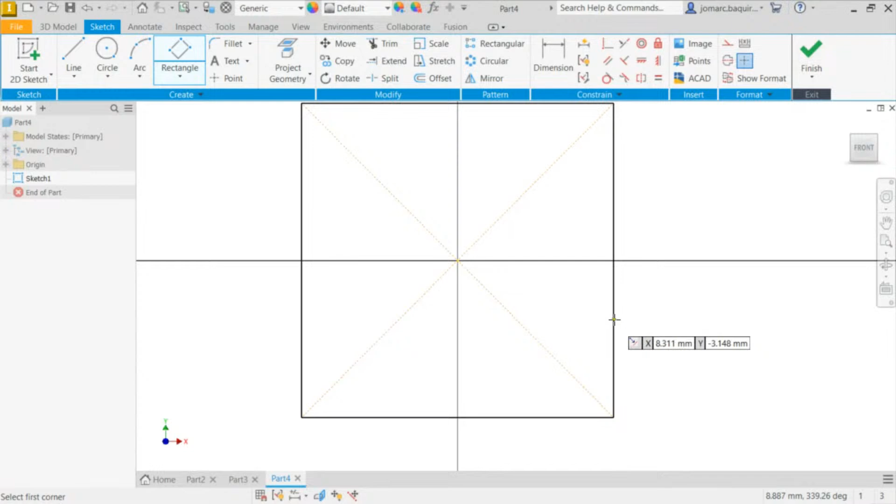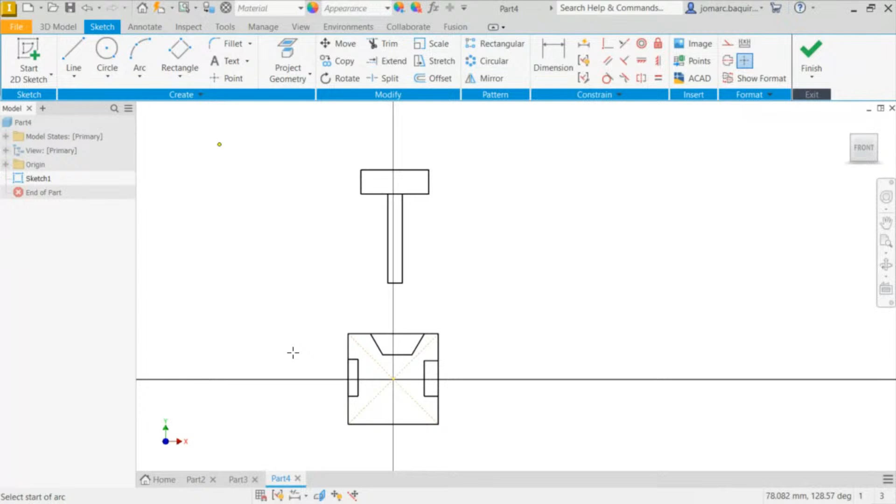Okay, notice here. Let me show that challenge once more. I'm going to create a line here. And for that peg, going to create a rectangle somewhere around here. Creating a quick sketch again. Again, showing you the challenge for that second part, which is based from an arc. So I want you to create that arc as well. So somewhere around here, we have an arc.

So again, for this challenge, notice here, I'm on sketch 1. I'm doing the sketch for this part, and for this part. So I want you to screen capture this challenge, and on our next meeting, we'll be requiring you to submit this challenge. Certificate of course completion to be given to those who have completed required tasks. So hoping to see you next meeting for the solution and checking of your works and these challenges.

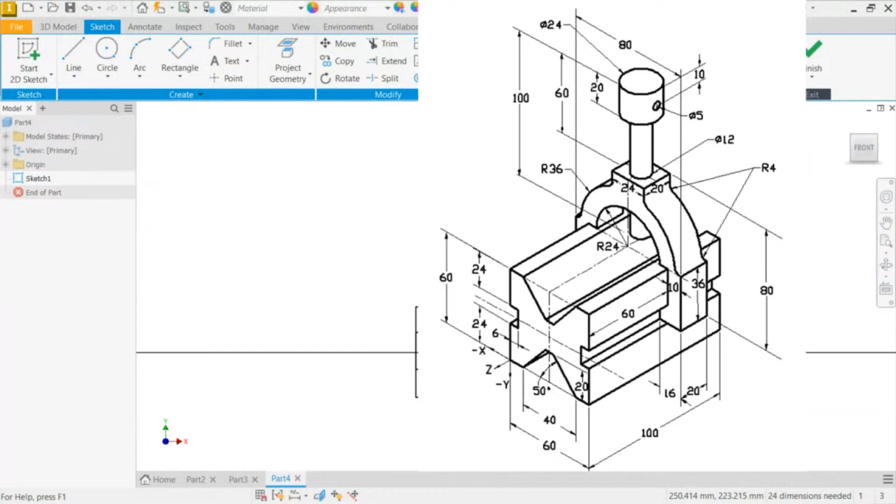Okay, so this challenge, and this challenge.

Inventor provides you with a stable and responsive environment to help you get your projects to production faster, with a complete set of tools for sheet metal, welded frames, tube and pipe, and electromechanical, and direct access to a robust content library and engineering calculators.

Shave days off your projects by rapidly configuring products using iLogic design automation technology. Speed up design reviews with a cloud-based tool that protects your intellectual property. Connect directly with AutoCAD for your project workflows.

You can extend the power of Inventor with a subscription to the Product Design and Manufacturing Collection to take your designs further with 2D and 3D workflows, cloud-based design and manufacturing, factory planning, and high-end visualization. Regardless of what you make, industrial machines, conveyor systems, or top fuel dragsters, solve your most interesting problems efficiently and effectively with Autodesk Inventor.

So let's say we decided to pull a foot off of that floor, we added a wall there. I would come in and modify the environment here, tell it for length, put in either an absolute, or in this case, if they said we'd subtracted 12 inches, I'd do it. And I would just tell it to update all my glass.

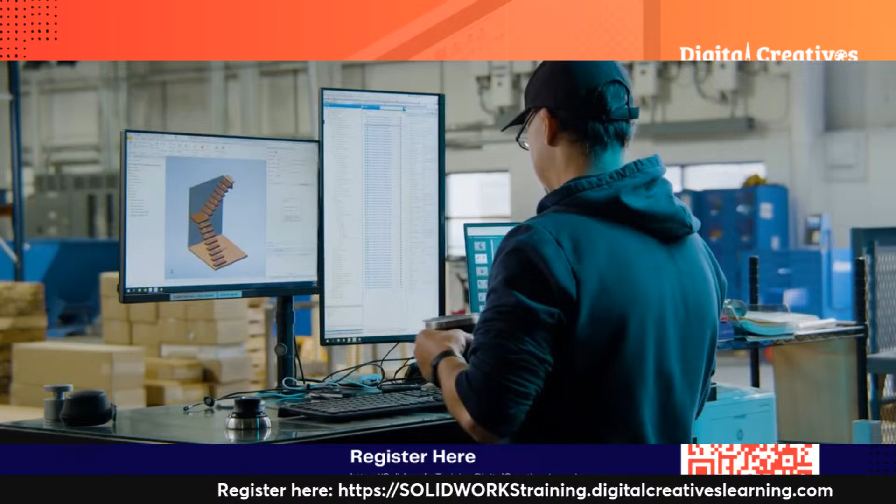It's going to automatically engineer it for me. It's going to make it so that it meets all building codes that our product is certified for, and it's going to generate shop drawings and production prints for these as it goes. It's that easy. We're manufacturing 10 systems, 20 systems a day right now.

With the Inventor CAM, we take the exact model that is part of our automation that we've used to design for the customer, and it's already toolpath. So that production engineer is just posting that right to the machine. It's a huge time savings, and it's a quality assurance. As we build in more and more automation, we continue to drive down potential errors that a user can make.

Welcome to Viewrail. Thank you. Have a seat. We leverage the Forge Viewer. It enables the customer to view on a web page on their phone exactly what we're engineering and how it will fit into their space.

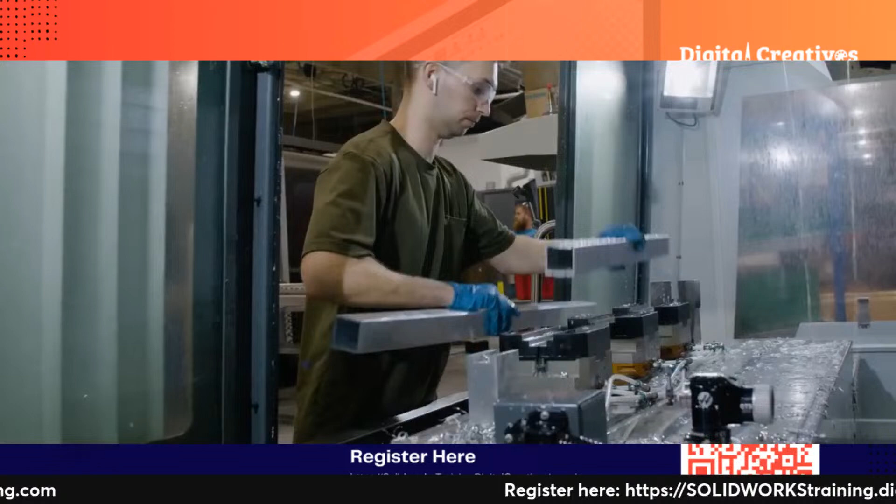This looks amazing. We are now over 10 times the size that we were when we started all of the automation. Then in the next 5 years, we're going to grow from $100 million a year in revenue to $500 million. Automation is critical for scaling at the rate that we're going. We would not be able to do the things that we are doing today and looking into the future without the Autodesk tools.